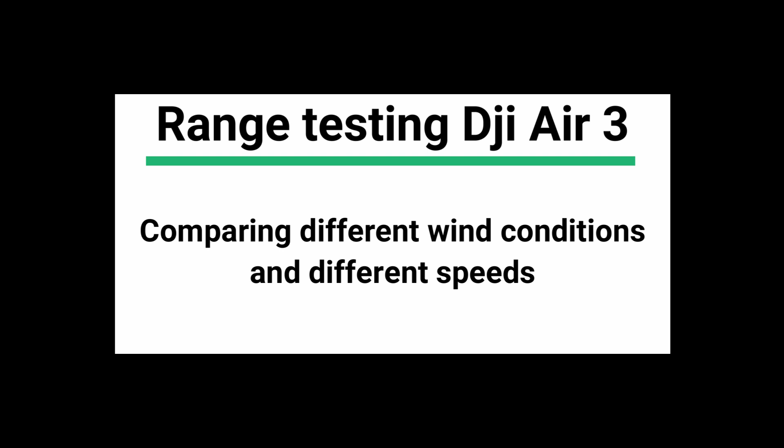Today I'm going to be talking about the range test of the Air 3 at different speed settings, and also about how winds may affect these results as we go through the video.

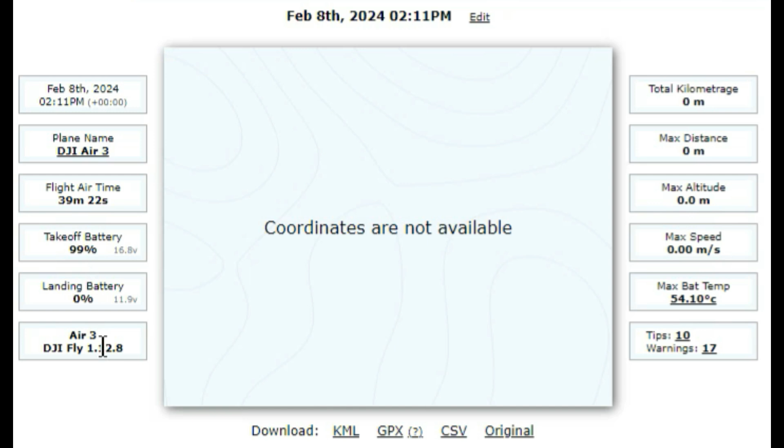I did a test of how long the drone would hover, and that was about 39 minutes and 22 seconds. Given it was slightly lower at 99%, it might be into the 40s if it had an extra 30 seconds or so. So if you change 39 minutes 22 into seconds, that's 2,362 seconds, and then divide that by 100%, that's 23.62 seconds.

That would be roughly similar to what I've got on my hover results here, when I did some checking to see how long the drone would hover for, between 22, 24.7, 25. So the hover time here was 25.

But if that 25 was maintained, that would be about 42, just over 42.5 minutes of hover time, but obviously on average it was a little bit less.

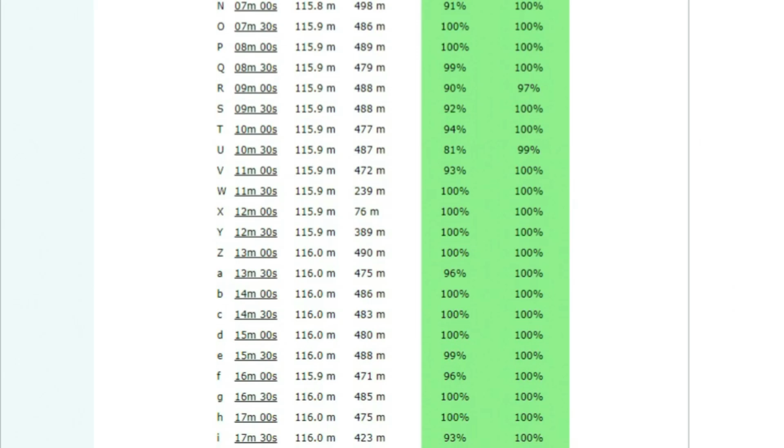So here we have the connection, and as you can see it's 100%, even over a few hundred meters with the Air 3. Comparing with the Mini 3 Pro, which has a few drops, it's still way better.

In the UK we use the CE mode of transmitter power, which is about 10 times weaker than the US's FCC transmission power, but it's adequate with the new technologies that DJI have on the Air 3. Should be more than adequate.

The only thing that could be an issue is trees and buildings, causing a lot of interference, if your drone is very low and has things in the way. That's the only way you can have connection issues. If you're flying only a couple of hundred meters away, you should never have any real problems with the drone's connection.

So doing a bit faster at 12 meters per second, which is supposedly where air resistance kicks in. That's kind of the point where, on a graph, the drone's range will be going upwards, and then at roughly 12 meters a second is where the resistance of the air kind of limits the actual range a bit.

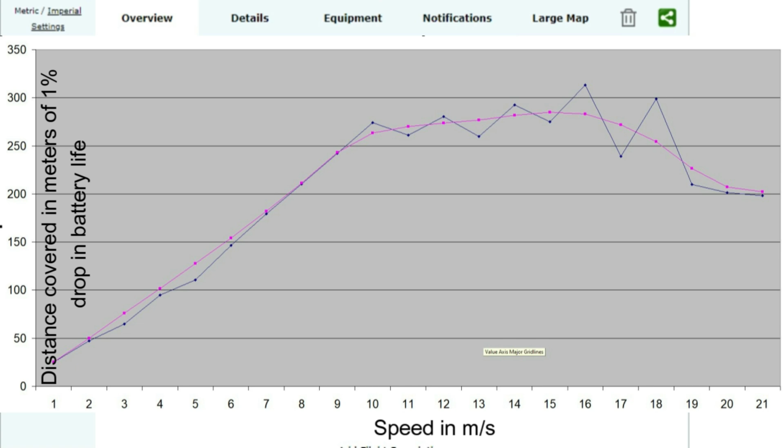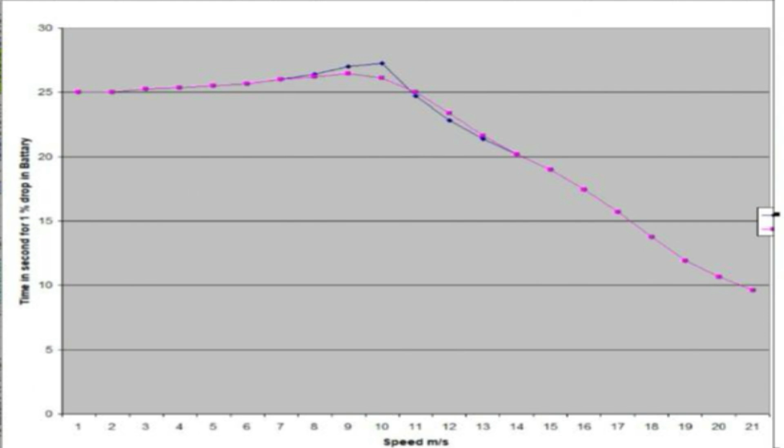As I'll show later on, you do get greater range if you have strong tailwinds.

And in sports mode, about 21 meters per second, that was 16.6 kilometers and about 16 minutes flight. So it's still more than the Mini 3 would fly at a slower speed. The Mini 3 Pro is 9 kilometers in sports mode.

I tried the maximum cruise speed of 15 meters a second, which is the new set cruise speed, up from 12 meters per second when the Air 3 first came out, and that was 16 kilometers, which was less than sports mode. So that actually shows this wasn't the best setting for getting better range, sports mode came out better in my results.

I wanted to figure out if I could get this more accurately, so do a distance test and see what kind of range I could get with the Air 3, and how the drone performs with tailwinds and headwinds, and what the performance would be in normal mode and sports mode, and slower, like only going at 5 or 7 meters a second. What kind of range is that?

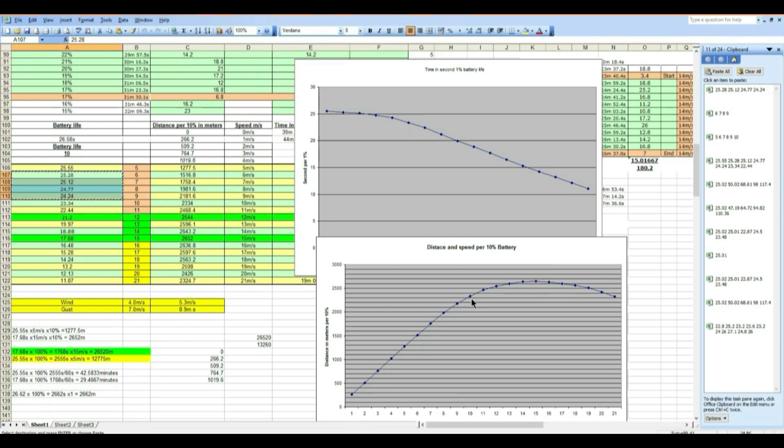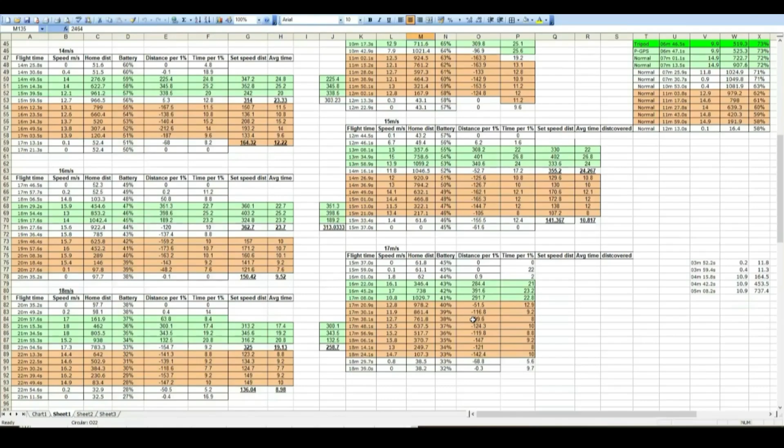So I've been taking lots of tests here to try and gain an understanding of the range, the average speed, and what kind of data I get from doing different flights, more data ranges, playing around with different range from UAV data, and trying to put it into something that makes some sense.

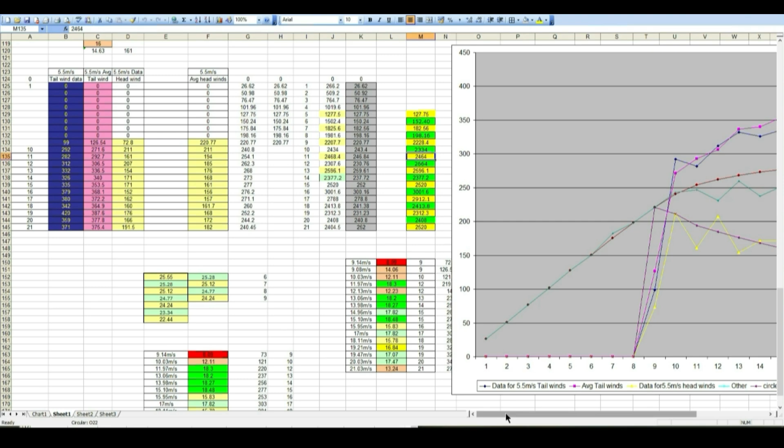One of the main things I discovered trying to understand this is that battery life is the way of monitoring power usage over time, along with speed. Like if you've got 9.6325 multiplied by the speed, that would be approximately 202 meters. So you can see that speed times time does have an effect, but you also have to take into account winds.

Actual winds don't really affect it as much as battery life does, because here for example you got quite large changes, and this is just slight variations. Here for example it's much higher and then much lower, so you get a sudden skew in the average because of this. For the same speed this is easterly, so I think I did this at a different time and I'm not sure if it was a different direction.

So this was definitely going in a westerly direction, and this is easterly. So I averaged the time and the speed, but this is taken directly from the average times between each depletion of battery.

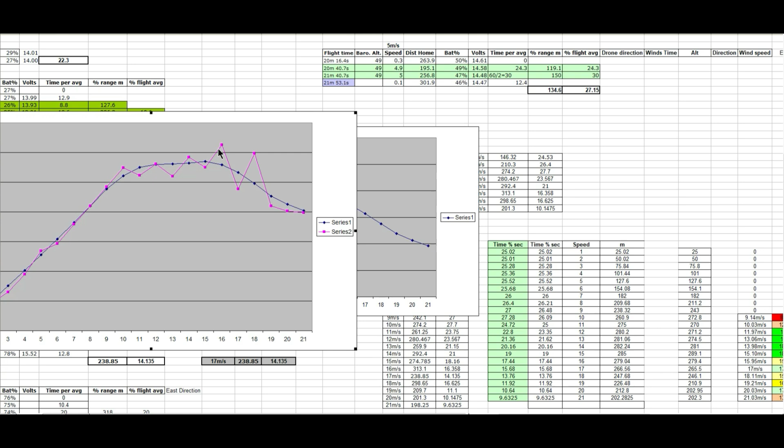It gives quite a different, even this gives quite a different set, from the speed.

So from all this data I've put together, you kind of get an idea for what the average speed is.

With very low headwinds, or so, you have an increase, then you hit the kind of speed like the cruise section.

And then you got sports mode here with your slight, obviously there's slight variations because of different directions, and this shows the battery life.

With 27 being nearly 10 meters a second, and the smoother kind of effect there.

So the real kind of distance is really battery life in seconds in drop of battery versus the distance that covered would give you the range.

But you can never get that, because I can't get the exact power level. I can never be absolutely certain on what the actual range is.

And get it nice and smooth, but it's kind of, I think, fairly close to what you would get.

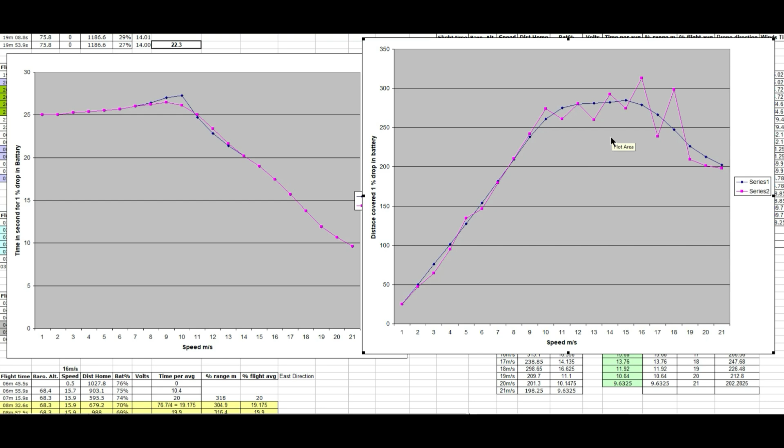Over the last couple of weeks I've been taking some data, and I've put together a kind of data set here on Excel to show how this looks.

So on this side we've got the distance covered per every 1% drop in battery, and this was the speed. Some of these are taken at different times.

This was taken most recently with winds of between 0.5 and 2, gusts of 2 meters per second.

But most of it is less than half, only about half a meter a second, or about walking pace, 3 miles per hour.

Here you've got 4 to 5.5 meters per second with a tailwind. So this upper one here is the tailwind.

I took, there's 420 meters. This is in the metric system.

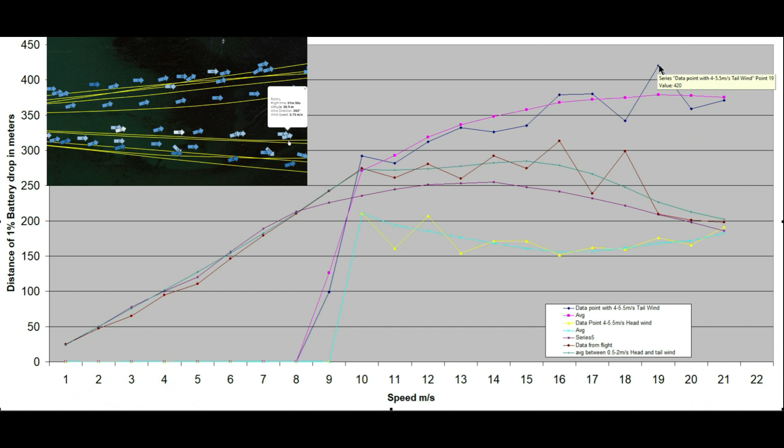So I got, I think, like 2 points. I think I did a little bit more on here just to get the farther distance, because to increase the amount of data...

So to get more than just one data point, I will get at least 2 or 3 data points when we're at higher speed.

When I did this particular result more recently, I took at the higher speed, I did increase the distance to get more than 1 point, because some of these, like this one here, is...

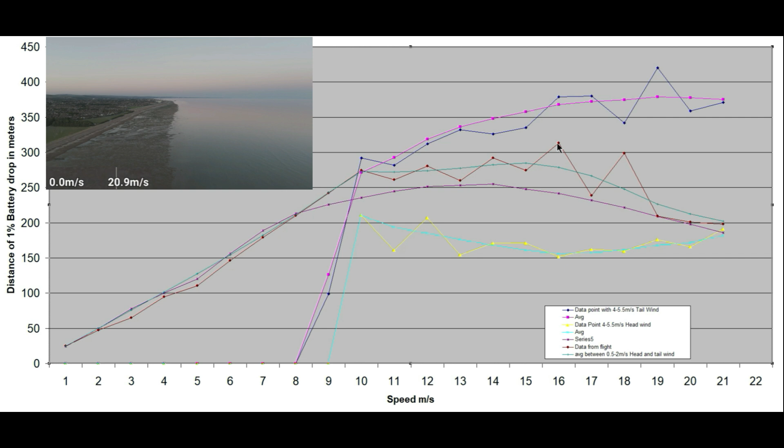Like 420 meters for what, just between a data point, so that's a lot of distance really.

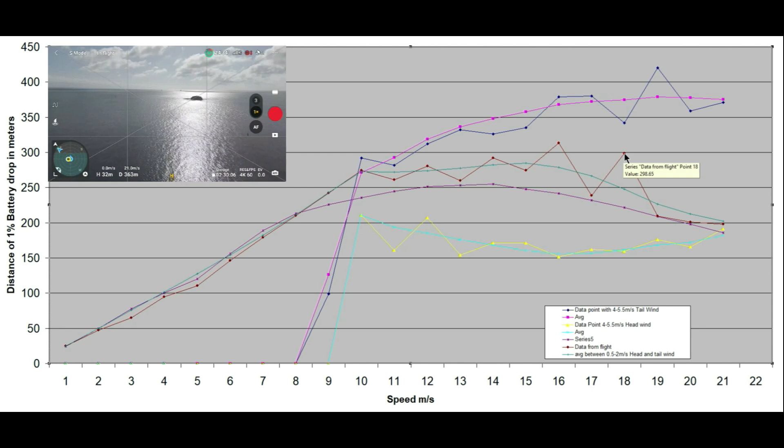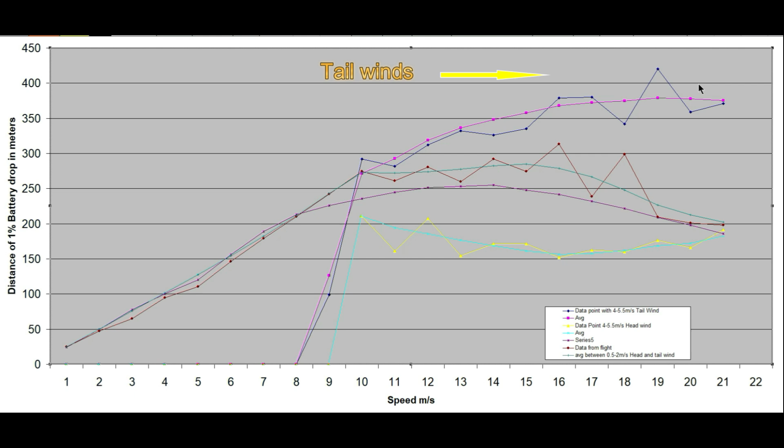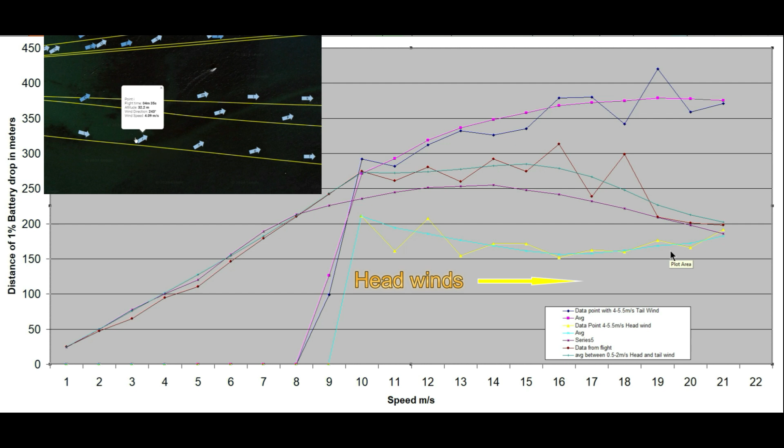So it's just to increase the accuracy, at least 2 data points. This one here is with the tailwind, this one's with the headwind. As you can see, it's more flat because you can't really go much faster when you reach the speed where the wind resistance equals the maximum power of the drone. This one was sort of very low or no winds at all, but even so there's a slight curve where the winds got a slight tailwind and then a slight headwind.

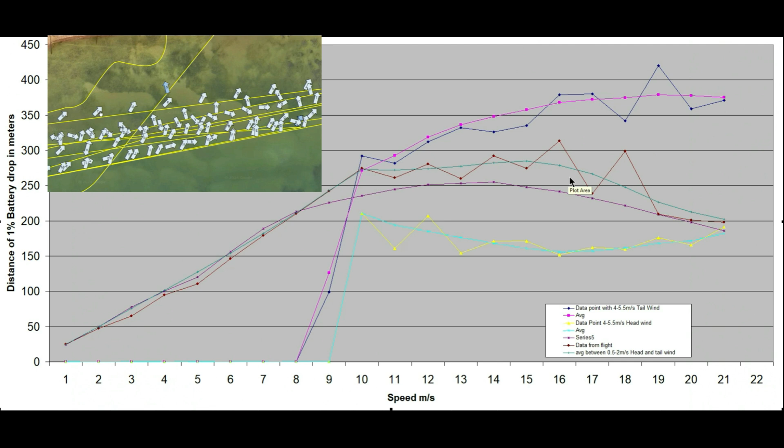So it's also because of the limitations - I think it's like nearly 600 meters, I can't really fly that far. The line in the middle only shows 0.5 to 2 meters a second, or for a head or tailwind.

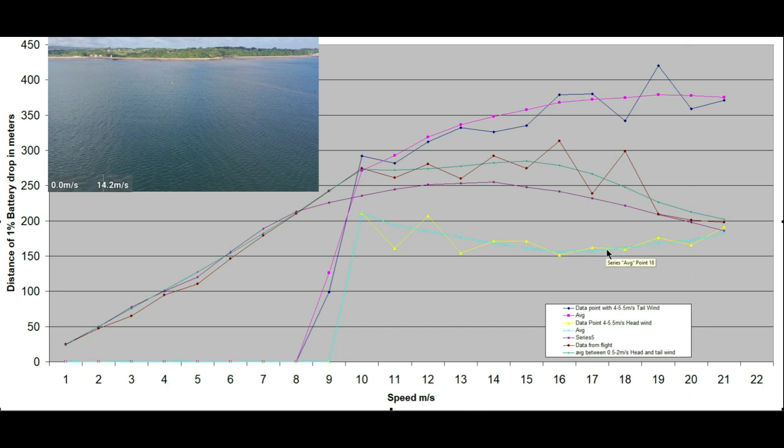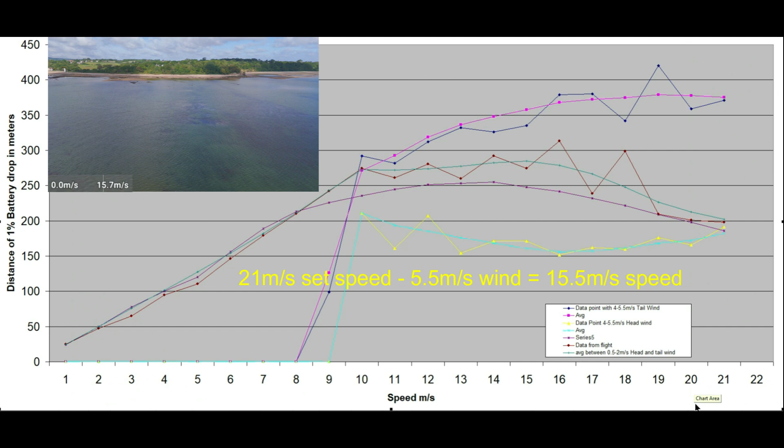So here there's a bit, even though it didn't seem to be that windy, I was getting about 5 meters, that's about 10, 11 miles per hour headwind. So if the maximum speed is 47, it would be down into the 30s, or about 15 meters per second. If you got 5.5 meters a second from maximum speed being 21 meters, then we're talking the maximum speed as visually accounted for in my filming was about that speed in a headwind.

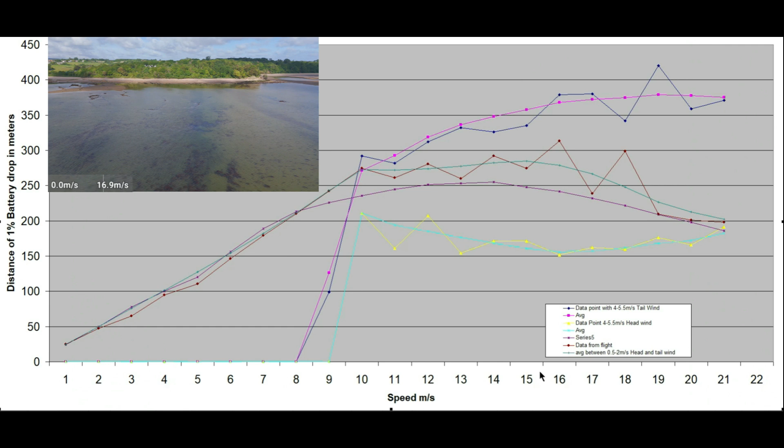So the main thing to take away from these results that I did over a couple of weeks was that if you have a headwind, the drone will reach a speed and then it will basically not go any faster.

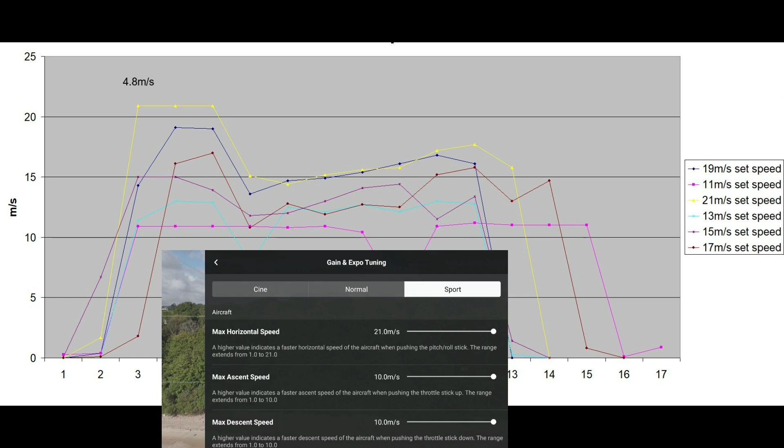So here this graph represents the speeds of the drone, various speeds of the drone with tailwinds. So here, this one, you got 4.8 starting with, if we take the yellow line here, and it climbs to 7.46 tailwinds. So all these ones are tailwinds, and the ones over here will be the headwinds. And obviously you can see here the slowest speed I put 11 meters a second.

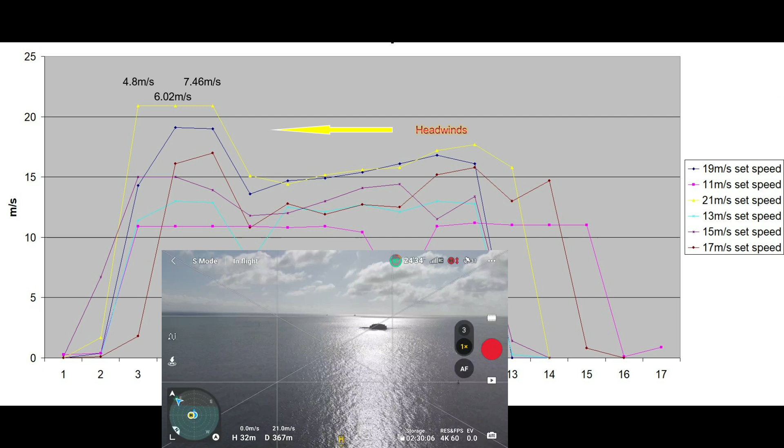So we carry on with the 21 meters a second in the opposite direction into the headwind. The headwind is roughly 5.2 meters a second coming back, and then you get 4.1 meters a second, and then drops to about 2.2 meters a second. As you can see, the yellow climbs up there to the top.

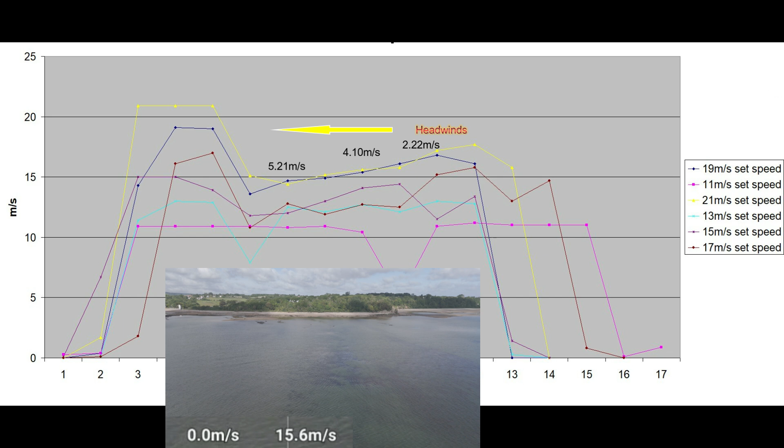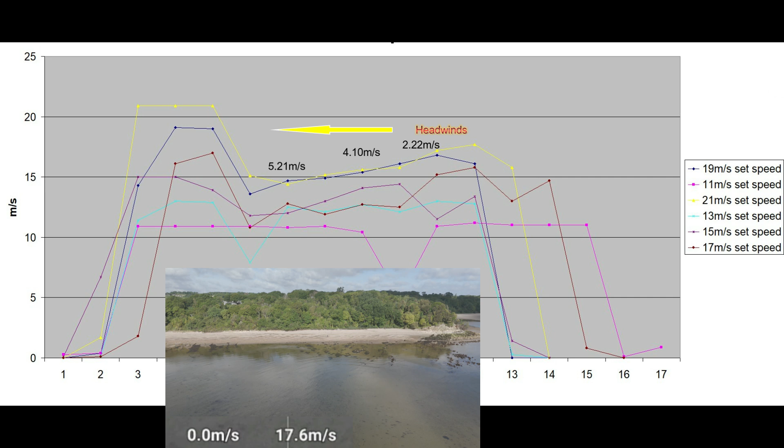There's a variation as each of these readings get different winds, and the tailwinds you can clearly see are higher, but they give quite a lot of variation in speed. Pinkish 11 meters a second being the set speed, which remains more or less constant throughout, with only just a drop where I think I stopped the flight at one point, but that shows the results there.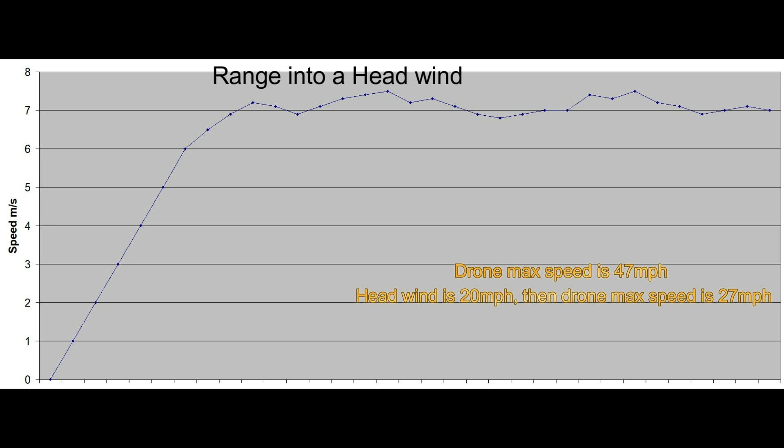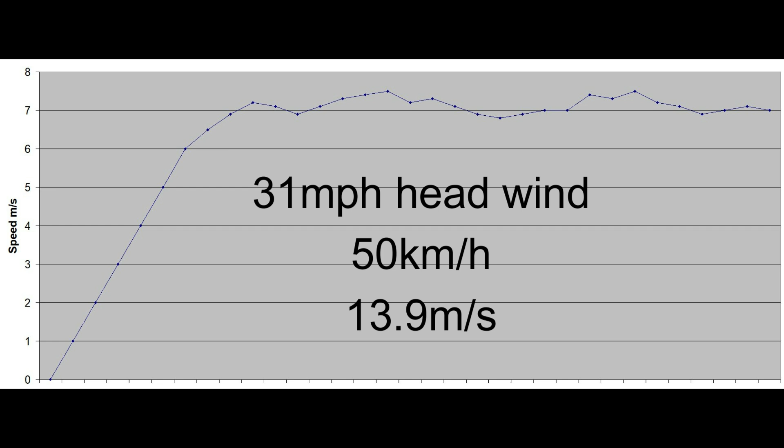So the Air 3 has a top speed of 47 miles per hour. So if it flies into a 20 mile an hour wind, its maximum speed will be 27 miles an hour, which it could fly into the headwind in sports mode, and it wouldn't be able to fly faster than that. Let's say that there was a 31 mile per hour headwind, and so we were flying into the wind - that would mean we would be doing like 16 miles per hour, which would be the maximum speed that the drone could move into the wind.

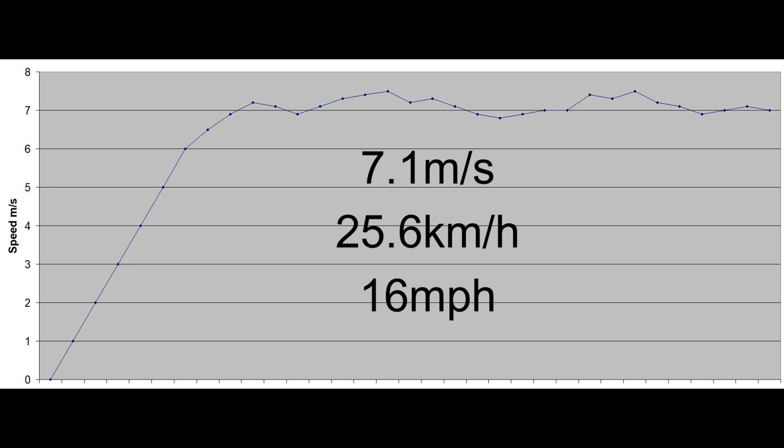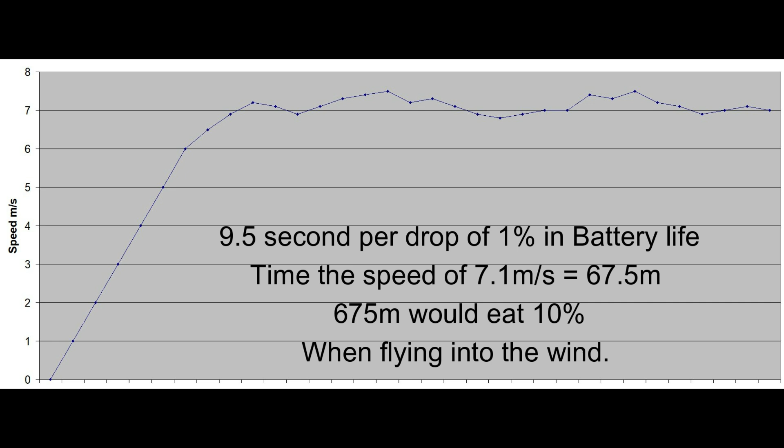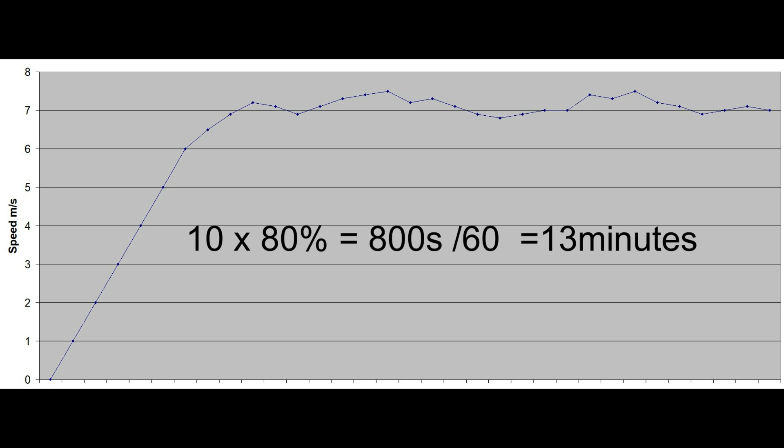So if we take in how much theoretically the battery would use and get the range you'd get with it. So 9.5 seconds per drop in 1% of battery would, at 7.1 meters a second, would give 67.5 meters. That would eat like 10% of the battery, just doing 675 meters into a 31-mile-an-hour wind. So if you have strong winds, if we calculate like 10 seconds in every drop in the battery life, you'd be getting like 13 minutes of flight time in the really strong winds.

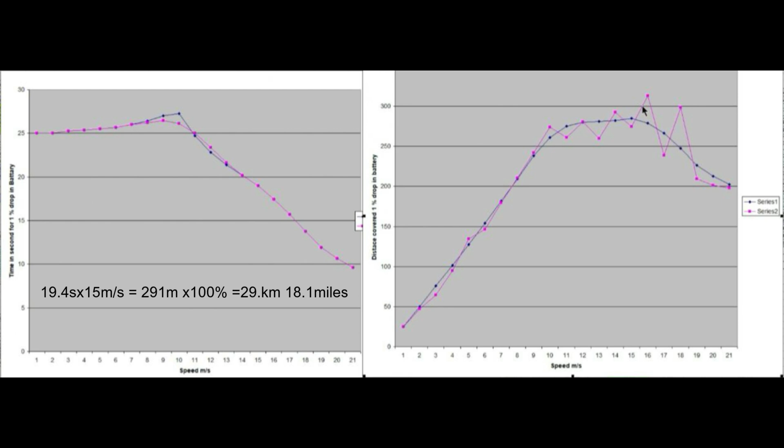So if we take our best time results of depletion of 1% of battery at 15 meters a second, that would be about 29,000 meters for a full battery. So that would be kind of the maximum range at no real headwinds or tailwinds.

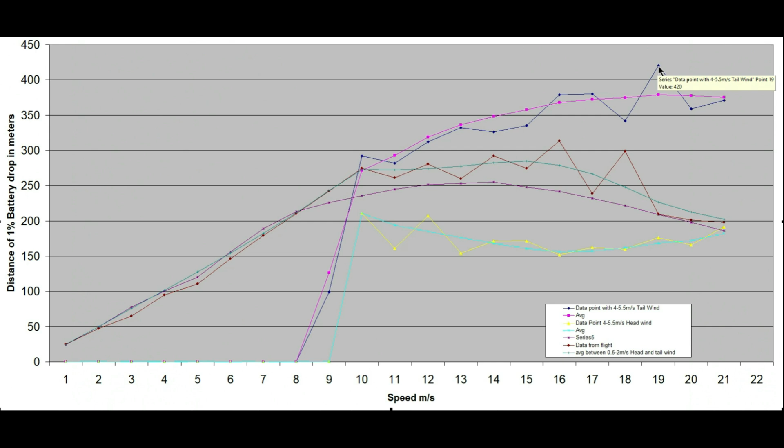So if I summarise what these graphs show here and how the performance of the Air 3 works - from the graph at the top here, you can see that the most efficient speed would be with a tailwind if you're coming back in the direction. So you get more range in terms, but it also shows it uses less power because you're flying with the tailwind. So if the winds are low, sport mode would be the best, with 15 meters a second being the optimum speed, if you don't have any strong gusts or winds, just sort of gentle breezes.

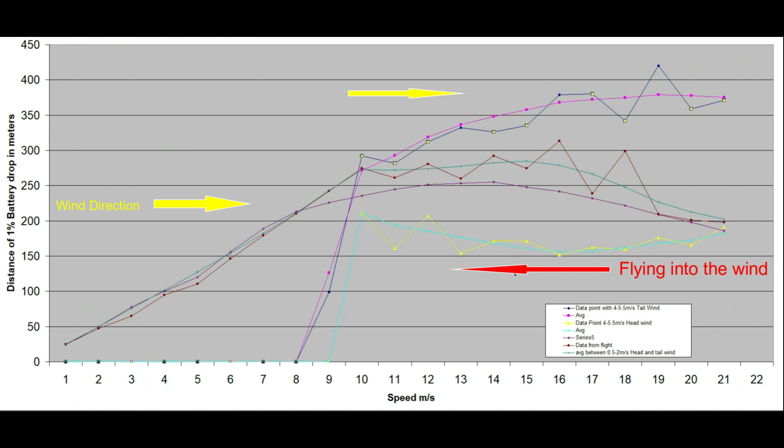There's no real advantage of flying into a headwind any distance, as the drone will only be able to go as fast as it can put power into the wind. So if it's using the maximum power and you're still only reaching like 10 or 12 meters per second, then the range will always be - here for example you've got around between 200 and 150 meters per 1% battery drop. So if you've got a strong wind, the drone's going to have less time in the air.